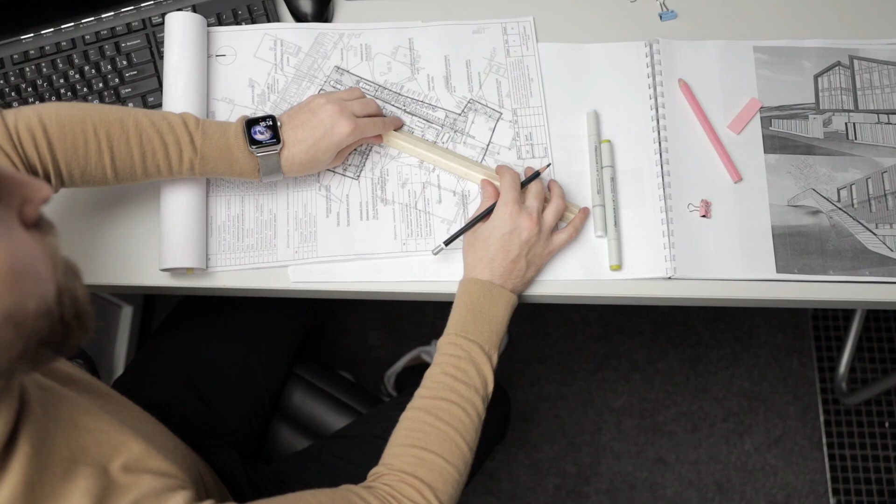The Victorian government is looking to knock down around 44 of these towers as part of their 30-year plan to progressively redevelop the sites upon which these towers are built. Shearforce Engineering have been part of a team of architects and engineers who have been studying these towers to determine the feasibility to rejuvenate and reuse them for decades to come. Towers of various forms are dotted around the suburbs of Melbourne. Some of the most well-known include Fitzroy, Flemington and South Yarra.

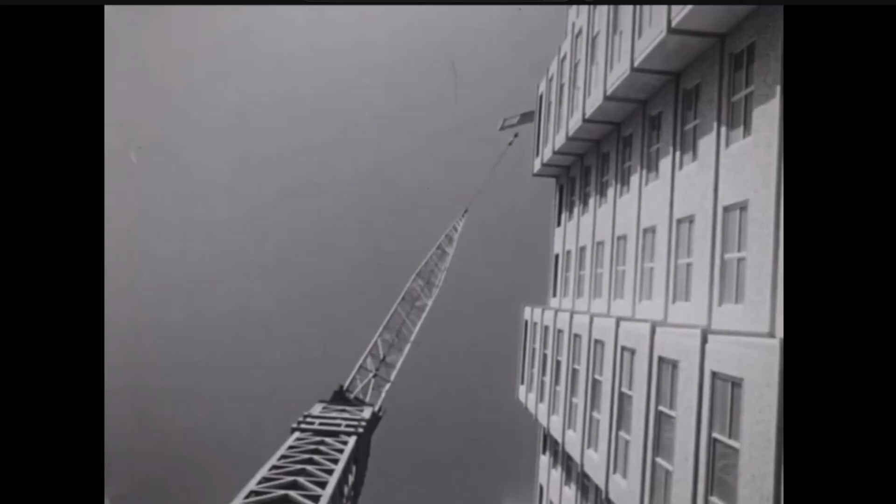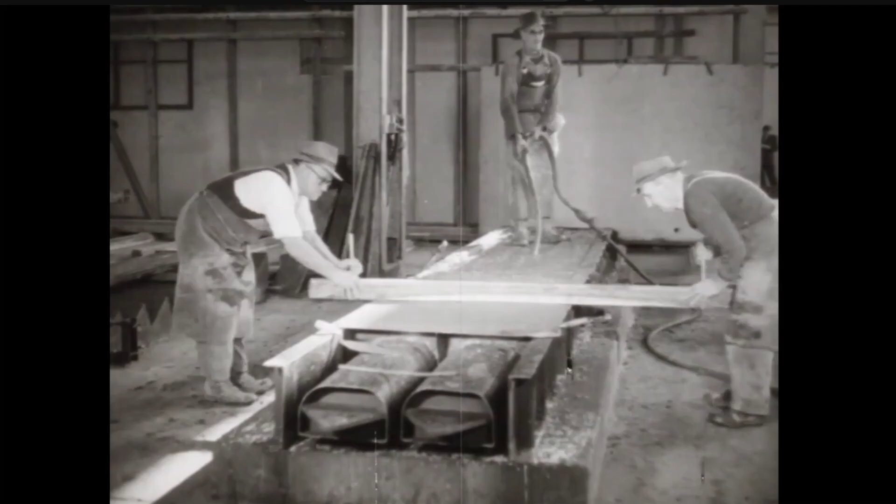From a logistics point of view, these towers were constructed back when government actually built things. The Victorian Housing Commission oversaw the entire process, from planning to design to the actual construction of the towers. The precast concrete panels used in the construction of the towers were produced at the Housing Commission's very own factory in Holmesglen. From a structural engineering perspective, these towers are fascinating to study. The 1960s saw the fledgling beginnings of the sophisticated precast concrete industry we know of today. Out of the factory at Holmesglen, precast concrete was manufactured for single-storey dwellings, power poles, fence posts, as well as the panels which were used in the Housing Commission towers.

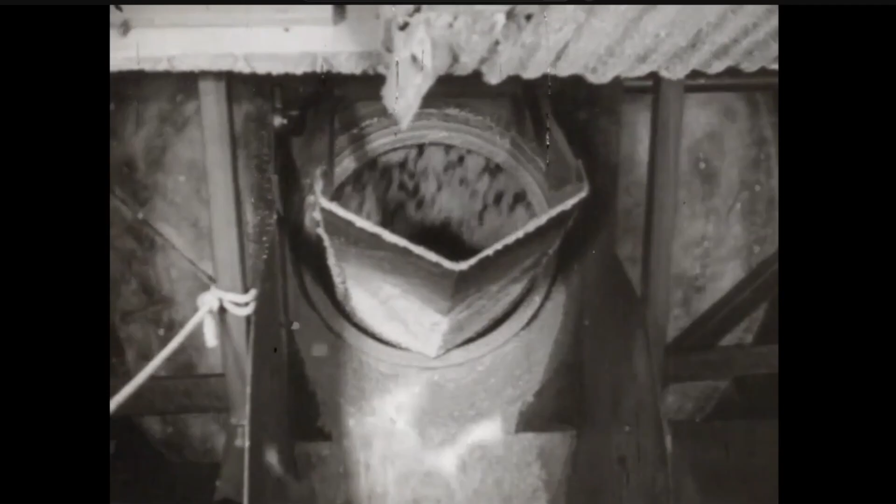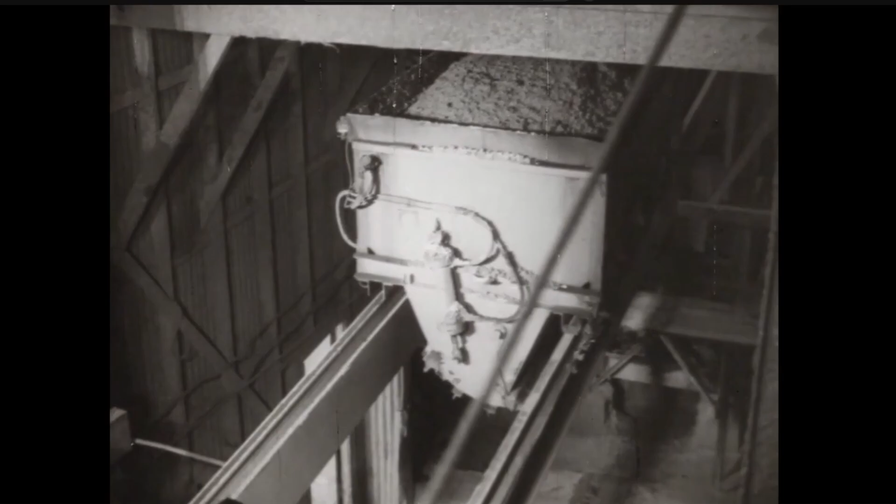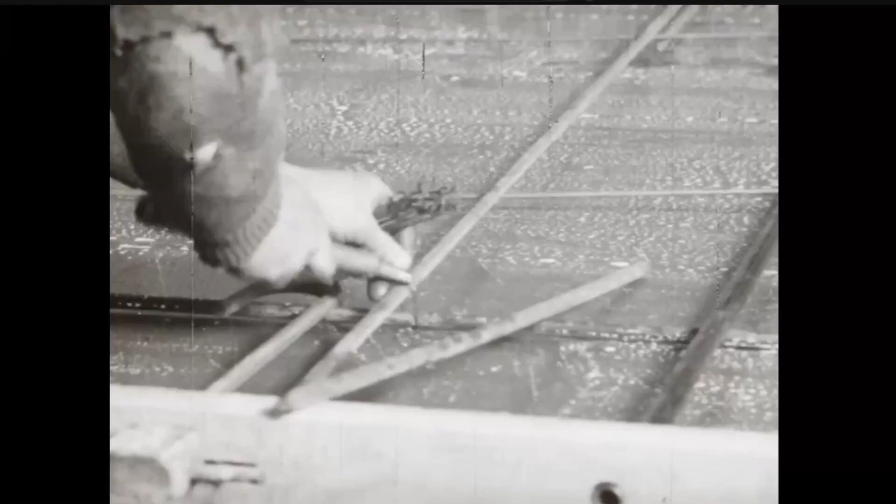For its time, the operations within the factory were at the cutting edge of precast manufacturing. It was an end-to-end operation where the concrete was mixed and batched on site. The Housing Commission partnered with the CSIRO at the time to formulate what was an innovative lightweight concrete mix that was 20% lighter than conventional concrete. After the concrete was mixed and batched, it was then delivered to the heart of the factory at the assembly line. The assembly line comprised an array of constantly moving forming tables, on which the factory workers would install the formwork for the ends and the openings within the panels and fix the reinforcement. The panels manufactured in the Holmesglen plant weren't just used in the Housing Commission high-rise towers. They were also used in single detached dwellings throughout Victoria.

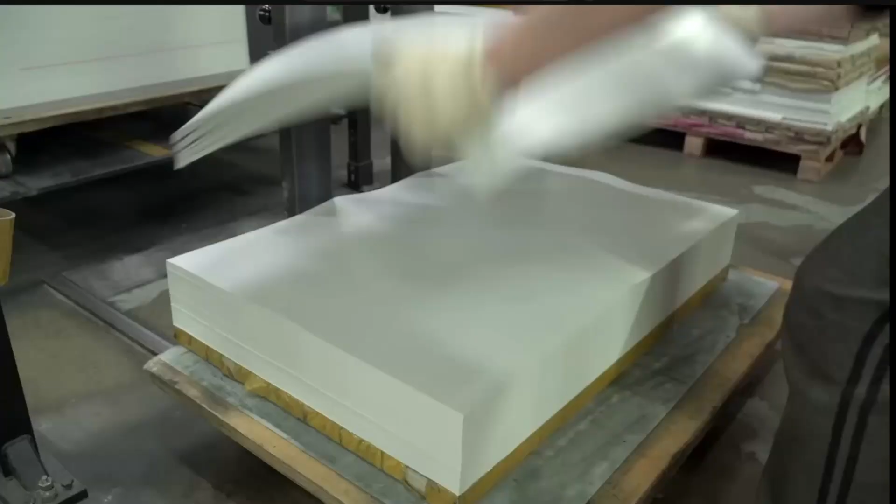So for all their innovation, how have the Housing Commission towers fared through the last 6 decades of continuous service? Are they indeed still fit for purpose? And can they be retrofitted to meet current design standards? Well, design standards have changed considerably since the 1960s. The most notable advancement has been that of seismic design. The first formal seismic design code was published in Australia in 1979. Therefore, most buildings built prior to this time are likely not up to scratch when it comes to seismic activity. The seismic design code then received a significant revision following what has been called Australia's first killer earthquake, which occurred in Newcastle in 1989. So let's take a closer look at these towers, and this comes with a warning.

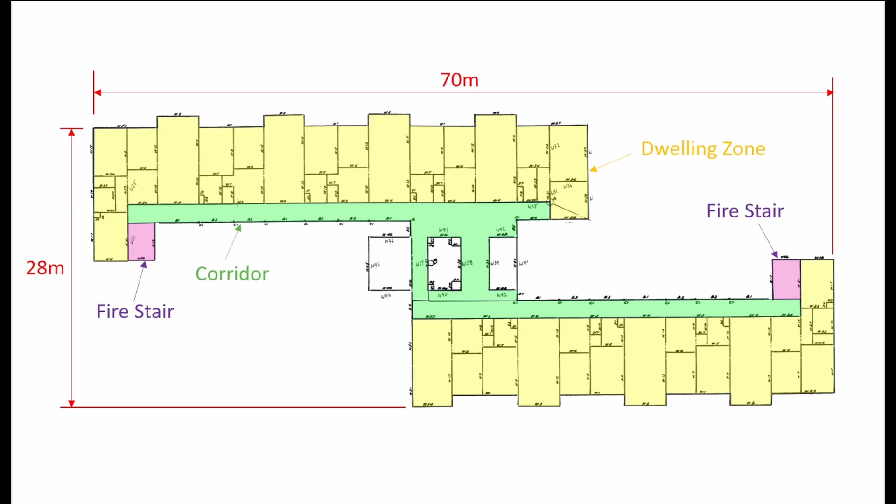We will be delving into some structural engineering principles and details when looking at how these buildings fare against current design standards. Here is a plan view of the specific tower we studied as part of our assessment. We've affectionately called this tower the S-type tower, given its geometry when viewed from above. It's about 70 metres long and 28 metres wide. Apartments are stacked horizontally, extending to the end of each wing of the tower. A communal corridor allows access to each dwelling, and fire circulation stairs are provided near the extremities of each wing. Centrally, there is a lift shaft housing 2 lifts, a communal area, laundry, and plant areas. The Housing Commission towers use precast concrete for the majority of the construction.

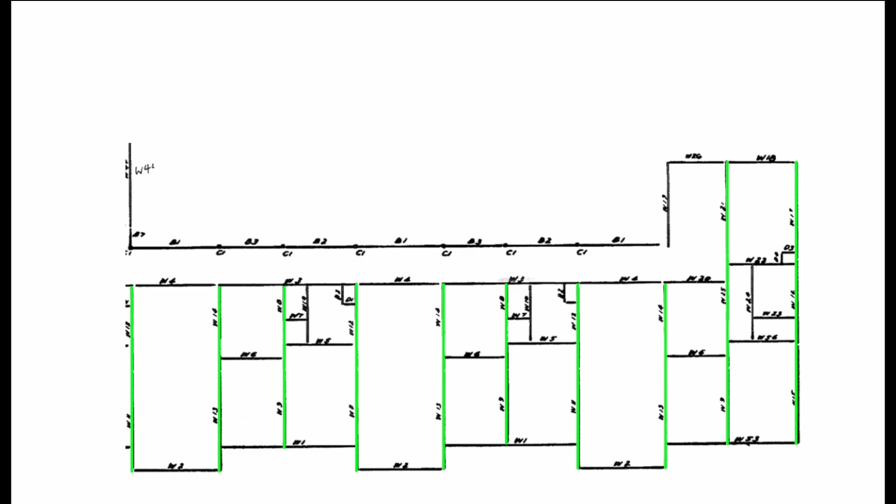Let's zoom in on this right-hand side wing and take a closer look. The party walls between each dwelling provide primary load-bearing support to the floors, and also a significant degree of lateral support for wind and seismic loading. The floor structure is a checkerboard arrangement of precast panels which are orientated in this fashion. With seismic design, the devil is always in the detail, so let's take a closer look at the junction between the primary precast load-bearing walls and precast floor segments. In terms of construction sequence, the first precast panel was landed. Then temporary propping and wedges are put into place.

The precast floor segments were then lowered into position. The ends of the precast panels were provided with protruding reinforcing bars where the ends of the floor panels meet the primary load-bearing walls. A first pour of grout was then applied between the ends of the floor panels and directly underneath the bearing surface between the soffit and load-bearing wall beneath.

Loose steel flat plates were then welded to the protruding reinforcing bars in order to allow the floor system to act continuously over the load-bearing walls. This essentially allowed the precast floor system to behave more like an in situ slab, which enhanced its performance.

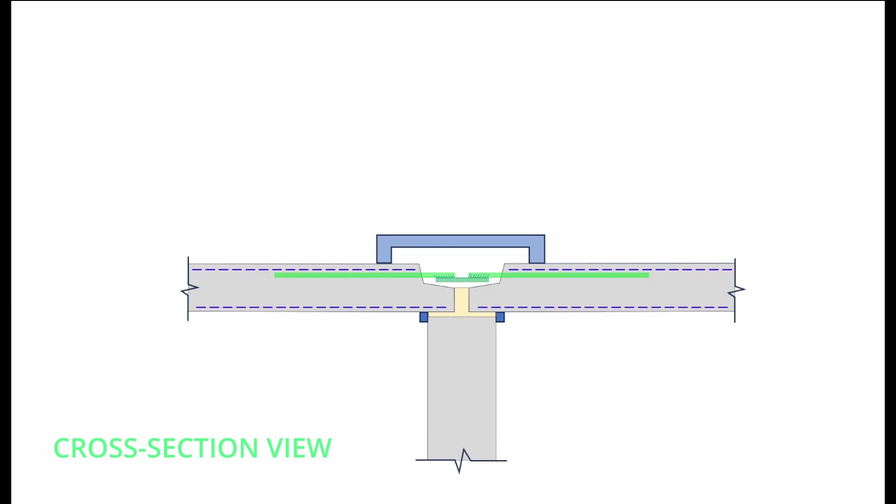A handful of small saddle props were then placed into position, ready to provide temporary support to the primary wall above. The primary wall above was then lowered into position onto the saddles. A secondary grout pour was then introduced, which provided full bearing contact to the primary wall above and encased the welded plates and protruding reinforcing bars which projected out the ends of each floor panel.

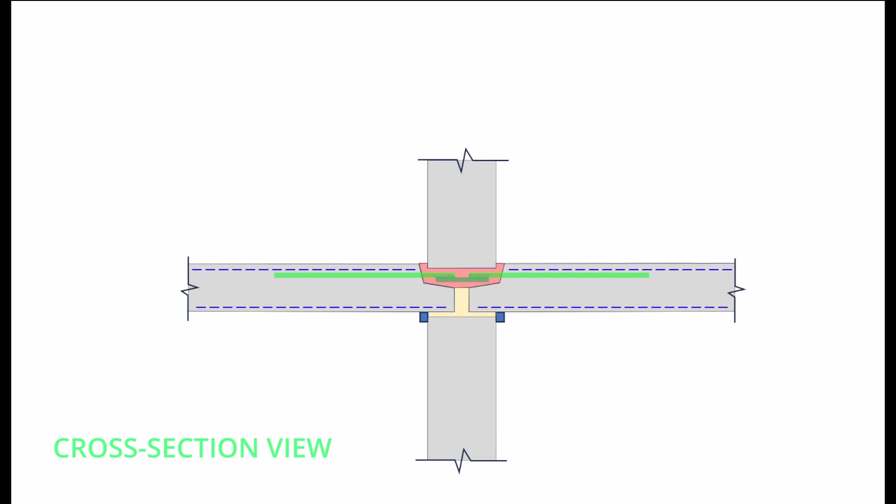The temporary support saddles were then removed, and the process was repeated some 20 additional times until the roof level was reached. If you are wondering where the positive connection is between the primary wall above and primary wall below, the answer is that for the majority of the load-bearing wall panels across the breadth and height of the tower, they don't exist. That's right, the tower would appear to resemble that of a house of cards.

Preventing the tower from toppling over under a strong wind gust is a combination of friction and the weight of the tower itself pinning it down. We have assessed the tower based on current code requirements for wind, and we've found that theoretically this actually works. However, just because something works doesn't mean you should do it. Or to put it another way, your scientists were so preoccupied with whether or not they could, they didn't stop to think if they should.

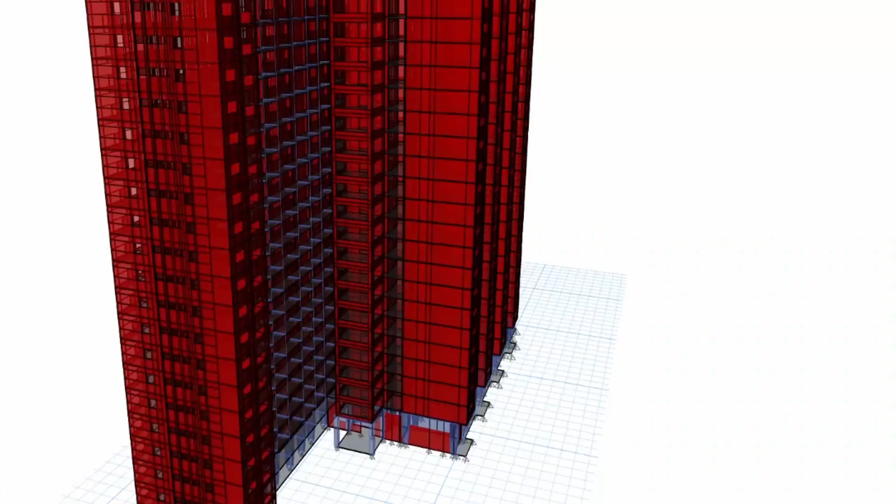So the towers as they currently stand are theoretically stable under design wind conditions. However, when you ramp up the horizontal load into the seismic realm, things become a little more interesting. The overturning moment due to a seismic event is simply too much for the towers to handle under their current detailing. What makes things even more challenging is that the reinforcement detailing within the precast walls themselves means that the building behaves in a non-ductile manner due to earthquake shaking, which increases the seismic demands on the building.

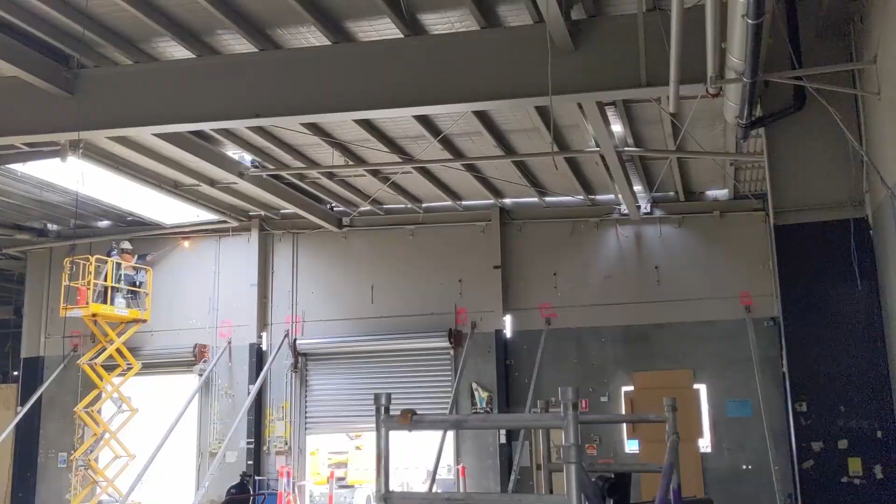An alternative to this is to adopt carbon fibre strengthening to achieve a similar outcome. These buildings have a lot of walls, so the labour and materials involved with either solution will be quite considerable. However, is the cost associated with these works more significant than knocking down the buildings and starting again? Well, the detailed study which we have been a part of indicates that significant cost saving can be achieved through strengthening and upgrading the buildings.

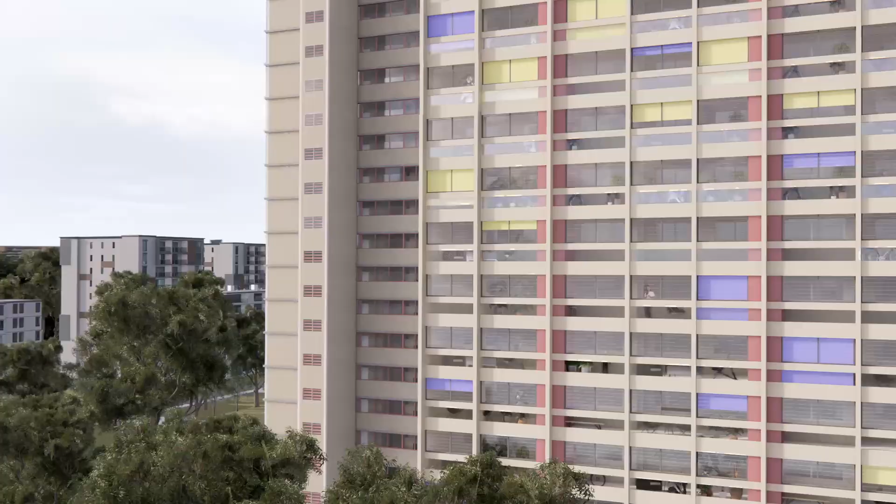As part of this study, other non-structural upgrades have been included as well, such as increased facade openings for more natural light, enlargement of living areas, new kitchens and bathrooms, upgraded heating and cooling systems, and double glazed windows. The study has been performed specifically on the housing estate in Flemington and has found that retrofitting and upgrading the existing buildings will result in a cost of $400,000 per dwelling, whereas the proposal to demolish and rebuild would cost $680,000 per dwelling. The study has also found that retrofitting and upgrading the existing buildings would result in a 55% reduction of global warming potential compared with a knockdown and rebuild.

On top of this, demolishing the buildings will result in significant social impacts to the communities of people who have lived in these towers, in some cases over multiple generations. This full report has now been released for public viewing. Much of the criticism directed at the Victorian government's decision to demolish these buildings has been due to a lack of transparency when arriving at this decision. The released report aims to provide that transparency, which appears to be lacking.

If you'd like a copy of the report, feel free to reach out. In the meantime, the hearing for this matter will recommence in the Supreme Court in the coming weeks. We will eagerly watch on to see the outcome and the decision.